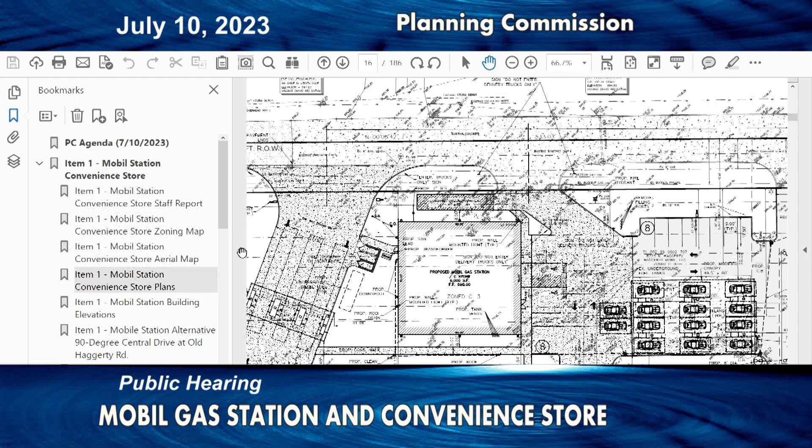So on this page, north is to the right, and south is to the left. Here are the proposed diesel pumps, and there's a dedicated drive there just for the trucks using that. Any trucks using the gas pumps would use the curb cuts here on the north side of the site.

And the last part of the site construction is the removal of a car wash. There's a small car wash building located on the far south side of the site that'll be removed without replacement. So for a change recently, we're seeing the removal of a car wash and not a new one.

For an automobile filling station, the zoning ordinance section 6.02C includes several standards for lot area, width, setbacks, access management, and a number of other development standards for gas stations. There are a number of existing nonconformities with the existing station, and some circumstances where the applicant will be applying for variances based on some of the proposed areas where the site doesn't comply.

The lot area does meet the minimum of 1 acre for a gas station. The maximum lot coverage for a gas station in the ordinance is 10%. The proposed lot coverage is 16.46%. The applicant has applied for a variance from that requirement. There have been other gas stations in recent years that have gotten much higher lot coverage variances, so that's something that'll be evaluated when the Zoning Board of Appeals looks at that variance request.

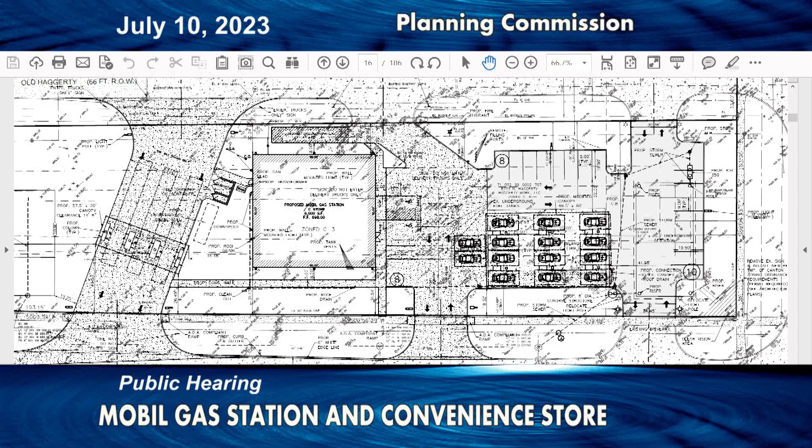So one of the things we've requested is that Fleis and Vandenbrink include something on their letterhead stating some of the conclusions they've emailed staff about, regarding no significant impact on traffic flow based on the previous traffic study. We think there won't be any different conclusions in the traffic study, but we've asked for a formal letter from Fleis and Vandenbrink to that effect.

The traffic impact study showed that the site can operate at an acceptable level of service D or better with some signal optimizations at the intersection of North Haggerty Road and Joy Road. Wade Trim agrees with the results of the traffic study.

For parking, there are 38 parking spaces proposed, which includes parking by the gas pumps and spaces located elsewhere on the site. So the standards of the ordinance are met for parking.

For loading and unloading, we noted some previous findings on the fuel truck loading, which would take place between midnight and 5 a.m. On the west side of the building, parallel to Old Haggerty Road, there's a loading space for the non-fuel trucks, so beverage trucks, food trucks, and things like that. Their dedicated loading space would be next to the building to the west.

For the architecture of the building, there's a minimum of 50% face brick, which exceeds the requirement of the zoning ordinance. There's a parapet illustrated that screens the mechanical equipment.

We have a couple of minor discrepancies between the color and black and white versions of the elevation plans, but nothing too major—we just need a little more information on the consistency between the two. The black and white version is more recent and shows more detail to break up the long expanse of wall by framing the brick with block. So the color elevation would just have to be matching.

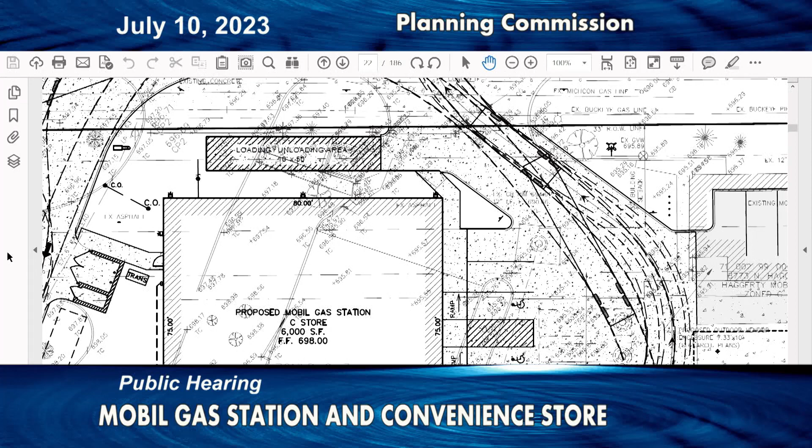Yeah, so there are several pages of the plans that show the turning template movements, not just for the fueling truck, but for other loading vehicles, the garbage truck, and I think a fire truck as well. That helps both the applicant and us to see the impacts of those alignments. On this one, where they angle this middle drive onto Old Haggerty Road, if this is the truck that's fueling, it's able to pull into the angle drive, and that angle allows the truck almost exclusively to be located within that drive, so that if the fuel truck is unloading fuel, there's still room between the gas pumps and the drive to circulate around the truck, and it doesn't back up any access that circulates around the canopy. The applicants also provided an alternative for the 90-degree drive.

And that one, it seemed like the truck was flying out too. And perhaps flying out's not the right descriptor, but also kind of needing a wide berth. It's a good description. Thank you. You're welcome.

Yeah. Yeah, so here,

If it's a 90-degree drive, our recommendation is that it might be best to widen here to make it two-way, so that depending on where vehicles may enter or exit, there's another way of access there.

On Old Haggerty Road, like the applicant stated, it's not a heavily traveled road because it has two users, and most of it is heavy truck traffic. But there could be times when some customer traffic goes there because it's easier to line up at Old Haggerty and Joy than somewhere else. But that's just having another option there.

So in this case, if they were to park the fuel truck and it's a 90-degree drive, the fuel truck encroaches into the parking drive aisle area, although I don't know if it's still the required 22 feet between where the truck would be and the edge of the parking space. It would also encroach in some of the circulation area, where more than likely a car could probably navigate around, or there would be another way to go on the opposite side of the canopy.

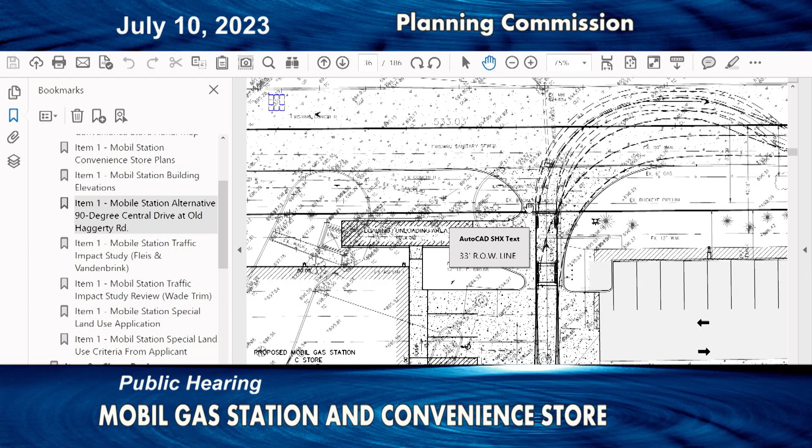I don't have any concerns, and I'm fine with option A. The angled option? Well, no, the... oh, this option, the 90-degree? No, not that. No, either. Oh, sorry, yes. Oh, the motion, yes, motion A. Thank you for interpreting for me, Summer. Yeah, I got it. Gosh, if it wasn't for you. All right, very good, thank you.

Since our report of last week in the packet being published, the applicants have emailed us some revised elevations. The changes the applicant has made now show the columns being wrapped in the Nichiha material, and the upper canopy still being EIFS but painted to be the same color as the brick so that the coloring matches. Those were based on some of the staff recommendations in our letter that we sent out last week.

For the other items in the staff letter, they're mostly the same as what they were last August in terms of the traffic circulation, setback schedule regulations, parking, landscaping, things of that nature.

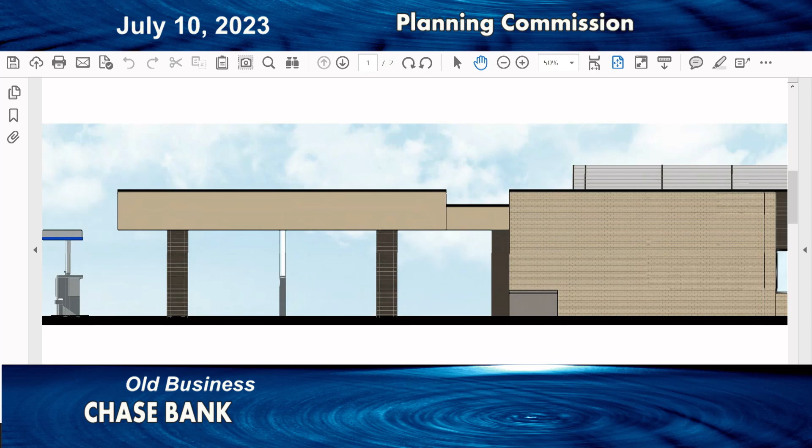So our recommendation for the site plan amendment is to recommend approval of the site plan amendment at the Chase Bank, including approval of the dimensions of the building foundation landscape areas and the parking lot island landscape areas shown on the plan, subject to the following 4 conditions.

First, wrapping the canopy columns in Nichiha or brick and modifying the canopy by painting it a consistent color with the building or wrapping it in paneling consistent with the building materials. As I stated, the applicants had addressed that first recommended condition.

The second recommended condition is showing the mounting light fixtures on the plans at a height not exceeding the peak height of the building screening of 17 feet 8 inches. Third, correcting any landscape discrepancies identified by staff. And fourth, including bollard details on the dumpster enclosure plans.

So that concludes our recommendation.

The only item I want to go back to is that the building foundation landscape is required by ordinance to be 10 feet deep, and the parking lot island landscape areas are required to be 12 feet wide and 150 square feet. In some areas of the site, the islands are less than 12 feet in width, ranging from 6 feet to 11 feet wide, so they're still viable areas. They're retrofitting a site by adding more landscaping than what exists now, so it is an improvement, but in retrofitting a site and trying to make it more compliant, they're not able to make it fully compliant and still get all the site elements there.

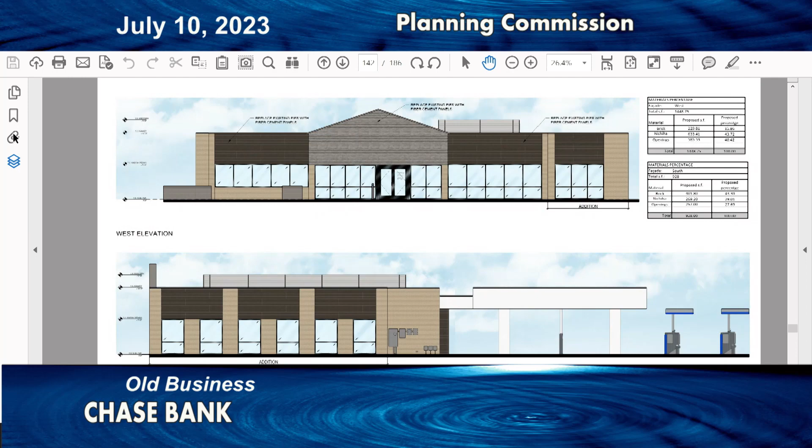The proposed design? Yeah, and the one that we approved last year had more of a square top. Triangle top, but the gable architect- there we go. Yeah, so this is what's proposed, and the one that we approved, I really like the square top. Is there some reason you got rid of that? I bet you do too, just knowing you're an architect.

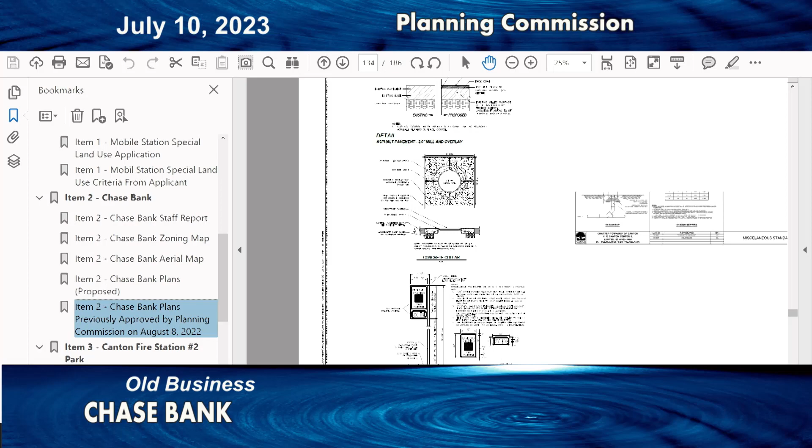It, like Patrick mentioned, came down to being overpriced. GCs started to price it, and it was above budget significantly. If further discussion about budget is necessary, there are some Chase representatives here.

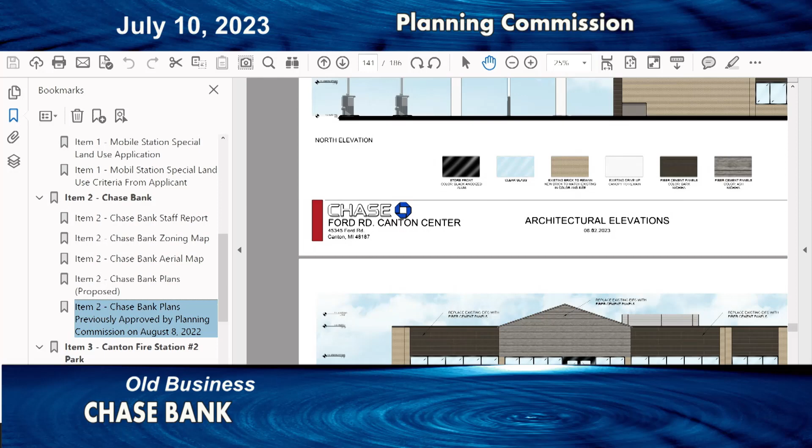Sir, if you could talk into the mic, because this is being recorded, thank you. And tell us your name please. I'm Evan Wise, I'm a real estate project manager with Chase. I was involved in the budgeting exercise as well as kind of shepherding design and getting contractor quotes.

So the reason why we're kind of scaling back is trying to maximize what we can do with the money, the funding allocated, while still making significant improvements to the exterior. So we're following the existing profile and upgrading the materials with the Nichiha. Initially we were going to do this larger parapet, but that was going to require additional structural modifications, footings, foundations out front, as well as tying back the structure to the roof. So there was a lot more involved there, and we had to go through significant value engineering just to get us back within a realm that Chase would continue to move forward with.

Any other questions? All right. Commissioner Okan? I am good, thank you. Are you really?

I just had one quick question. I think at the end of your comments you mentioned you went and value-engineered everything to try to figure out how to make this work. I'm just an educated real estate guy, so going from the flat rectangle shape in the front to the other design, what degree of cost savings did that give you? I'm just curious.

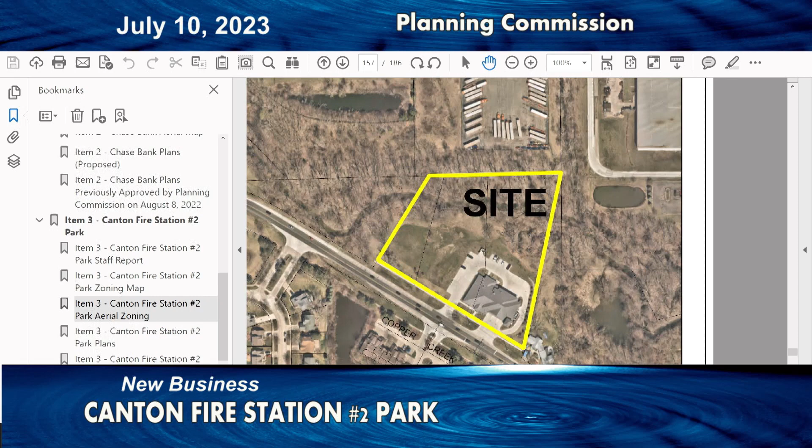So there's plenty of parking on the site that can handle any additional demand as a result of the park, and it's a relatively small park in terms of land area and amenities. The reason this is before the Planning Commission is that the Michigan Planning Enabling Act, state law, requires that whenever there's a new park or new public amenities like this, the Planning Commission reviews the plans. So this is before the Planning Commission for both a new park and somewhat of a site plan amendment for the previously approved site plan for Fire Station Number 2.

There are no changes to the site for access management. The existing drive on the west side of the fire station will continue to be used by the public for access. So there's no changes to the access management, no changes to existing sidewalks, which exist along the frontage of Warren Road. There's no new lighting proposed. The park will not be open during evening hours, and there's existing lighting at the fire station site, which includes 3 light poles along the west side of the parking lot.

There's no additional garbage removal requirements other than the additional receptacles for garbage and recycling. And there's an existing dumpster on the site, so if garbage needs to be put into a dumpster, that facility is already there without the additional need for construction.

And then the site will be landscaped further. There's an existing landscape plan for Fire Station Number 2, which complied with the zoning ordinance when it was approved. There are some modifications where one tree is removed, but the plan proposes one new deciduous tree, two new evergreens, and several shrubs and pollinator plants for the site. So the landscaping will be enhanced and will meet the standards of the ordinance and the previously approved plan.

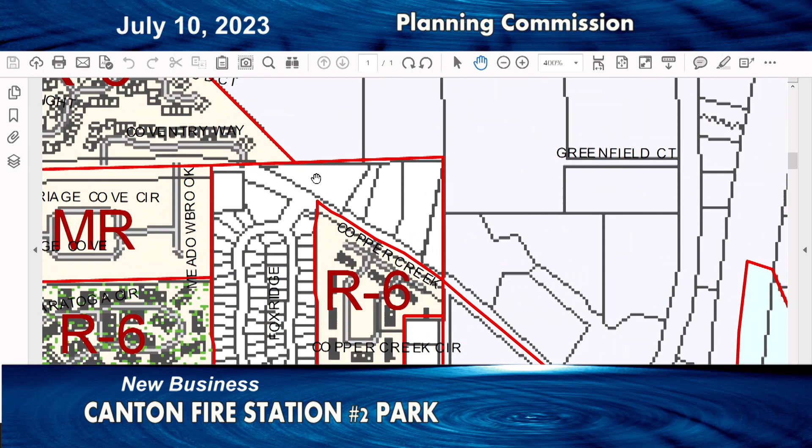It'd be nice to have a walk continuing to connect it to - what is this, Lilley? No, I mean to the west. Yeah, that's Lilley. Because there's sidewalk all there, and then now there's this gap. Not you guys, but whoever that developer is, when they come in, it'd be nice to put that walk in, then you'll have a full connection. Yeah, and that'd be a nice ask of Wayne County to actually widen the road and put a sidewalk in. Just a suggestion - they won't listen to us though.

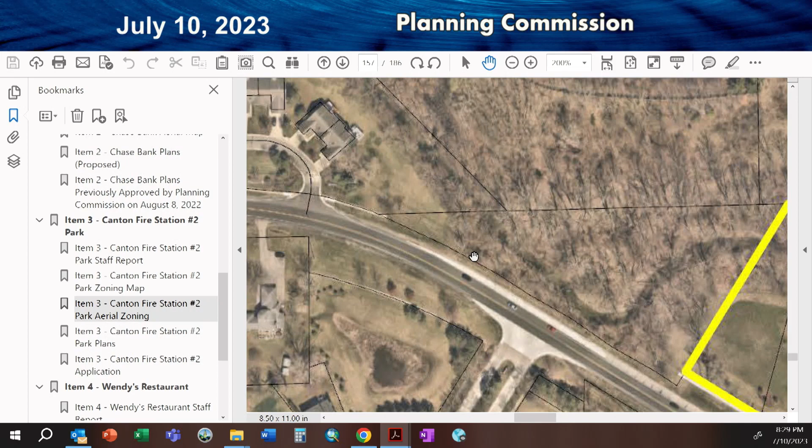Nice. Yeah, this parcel here to the west, it's a little challenging because it has the creek that runs right through it, and so there's quite a bit of floodplain in that area, not a lot of uplands there. When we were looking at the sidewalk gap, which is on the gap plan for engineering, it would have to be a boardwalk through that area just because of the wetlands and the creek being right there. But it is on their radar of tackling that one, whether through grant funding or just through the gap program if the owner doesn't take care of it themselves.

Great plan, love the idea. I'm always for more parks. So the name is Fire Station Number 2 Park. I don't think it's going to be anything other than that.

We didn't really feel comfortable naming it after the creek, just based on the history of that. There's not necessarily going to be signage for the park, it'll just be more in our marketing. The only signage proposed at the park right now is the interpretive signage, just because it's such a small thing and people in the area will use it, but it probably won't be a sought-out destination.

Our consultant, when it was designed, chose a prefabricated boardwalk that could be done in a timely fashion. That way it's not something that's continued to be drawn out, because we know we want to have an impact and a quick turnaround in this process if we can.